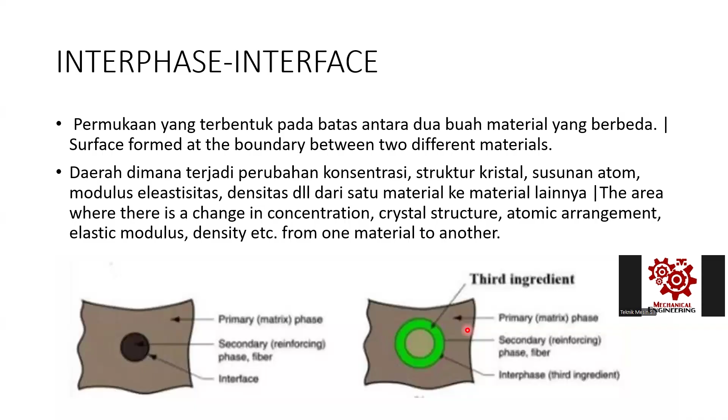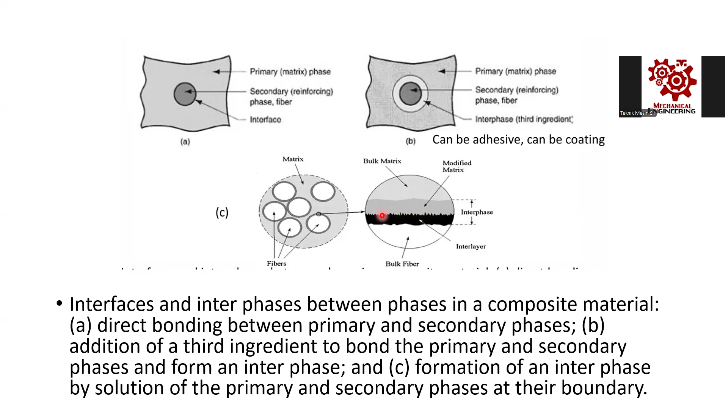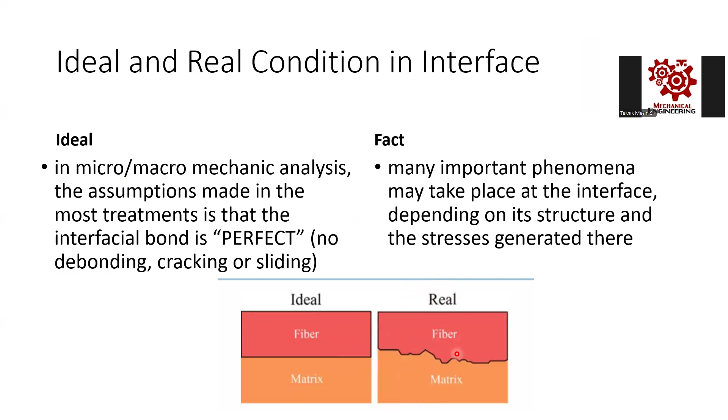Condition on the interface: the ideal in micro and macro mechanic analysis, the assumption made in the most treatment is that the interfacial bond is perfect. So the ideal between fiber and matrix is menempel - rata, menempel, sangat erat. But in reality, because there are many phenomena, depend on the structure, depend on stresses generated, the reality between fiber and matrix is like this - jadi dia nggak rata, more rough, lebih kasar antara hubungan serat dan matriks di kenyataannya.

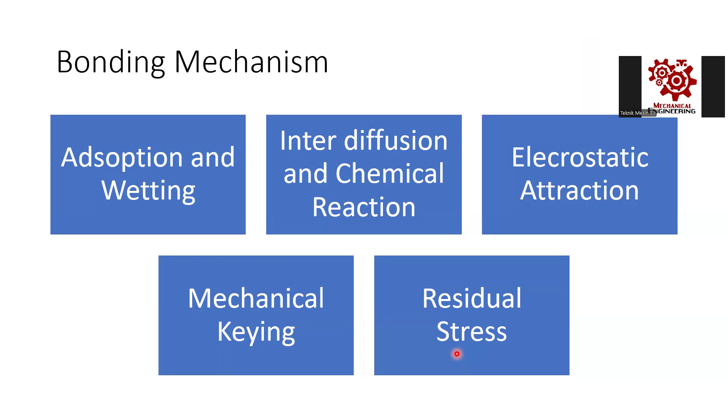Oke, so the bonding mechanism has five types: interdiffusion, chemical reaction, electrostatic attraction, mechanical keying or mechanical interlocking, and residual stress. Actually this is what happens on the interface - ini apa yang terjadi pada interface itu.

Oke, pertama kita mulai dari wetting and adhesion. Jadi ini salah satu parameter untuk kita mengetahui, oh ternyata interface dan interphase ini terhubung dengan baik - hubungan antara serat dan matriks ini terhubung dengan baik. So this is the parameter to determine whether the bonding strength is good or not.

The first we start from wetting - atau kalau dibahasakan, pembasahan. Wetting terjadi ketika dua permukaan benda bersentuhan secara spontan, bahkan sampai skala atom, saat keduanya didekatkan satu sama lain. So wetting is when two bodies spontaneously come to intimate, until atomic scale contact, when they are brought close to each other.

So when there are two materials close to each other, the two materials become one body - join, mix. Dia akan menyatu ketika digabungkan.

For example, if you have two water droplets - kalau misalnya kita ada dua butiran air di sini, ada di sini. For example, when you see water, and then when you try to move this water into this, so the water becomes one. So this is an example of wetting. And the second, adhesion.

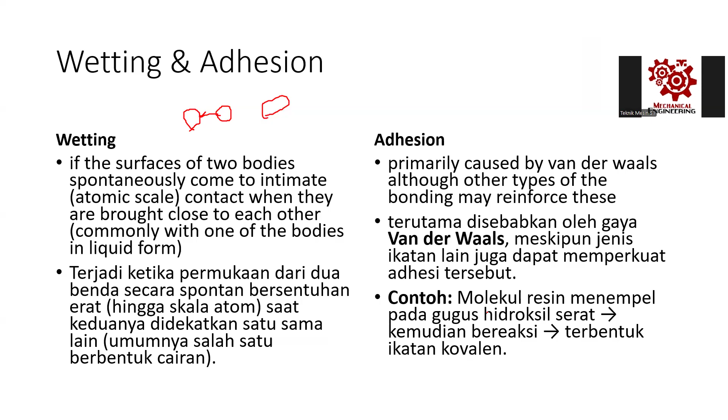For example adhesion: when resin molecules attach to the fiber groups, they will react and form a covalent bond. So for reaction when you use resin for fiber, the resin will bond with the fiber.

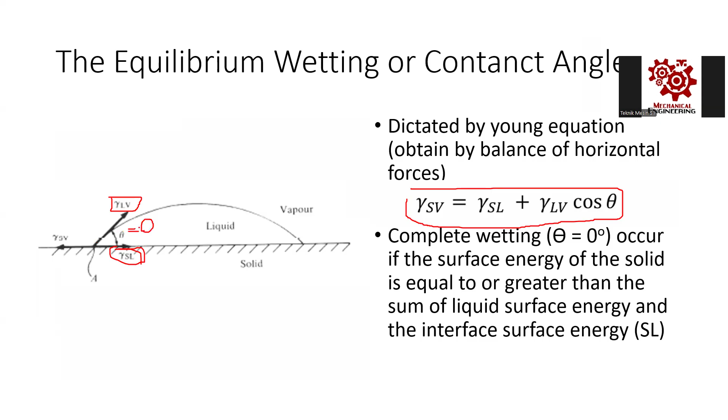So complete wetting happens when the angle is zero, when the angle here equals zero. This is called complete wetting. Here is an example of complete wetting, and at 180 degrees there is no wetting.

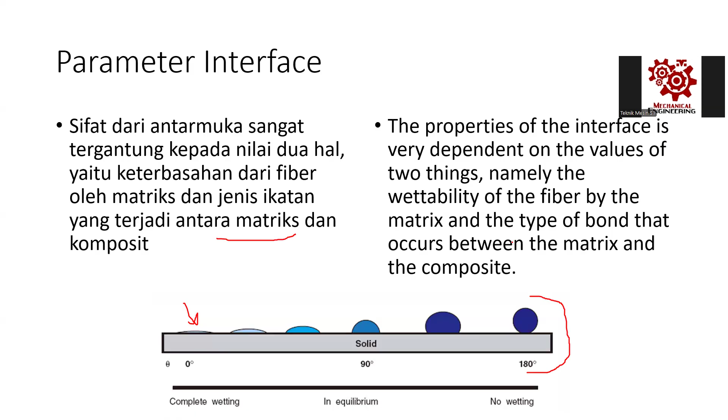So the interface properties depend on the wettability, and second, on the type of bond between matrix and fiber in the composite. On wettability, we must also know the terms hydrophobic and hydrophilic.

We know phobic means scary, like afraid. So hydrophobic means it is like afraid of water - hydro is water, so hydrophobic means afraid of water. That means if the surface has a hydrophobic surface, it will not mix, will not make good bonding with water.

Meanwhile, hydrophilic is the opposite of hydrophobic. That means hydrophilic is very fond of water, so hydrophilic likes water, which is why it can bond with water.

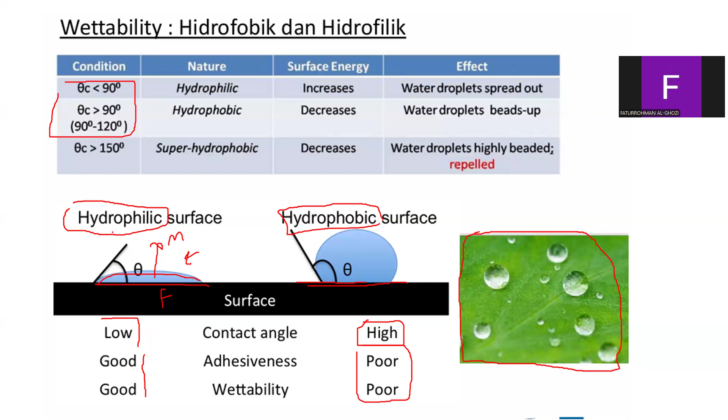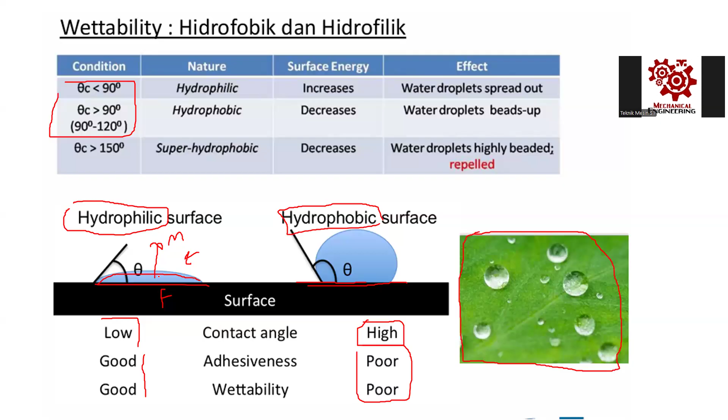So, for water this is only for simple illustration. But wettability means, what is it, most of the joining between matrix and fiber. The simple one is like that. This is the example, I take it from a paper. So the effect of alkali treatment on wettability of the coconut fiber.

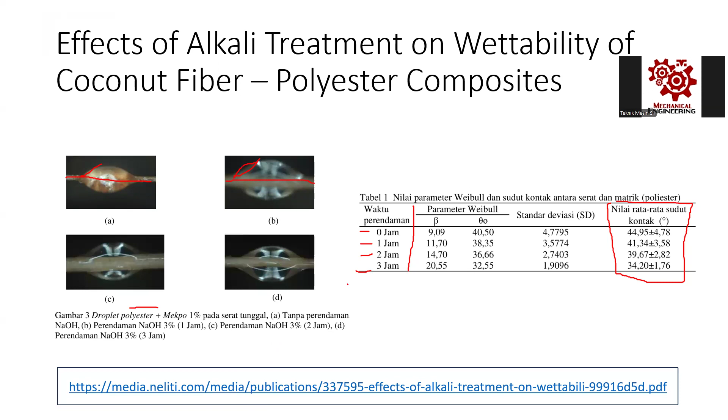If you want to see details about the paper, you can click this link. Okay, and then the first is about the electrostatic attraction. Elektro means electric, static means still. So electrostatic attraction occurs if two surfaces carry net electric charge of opposite signs.

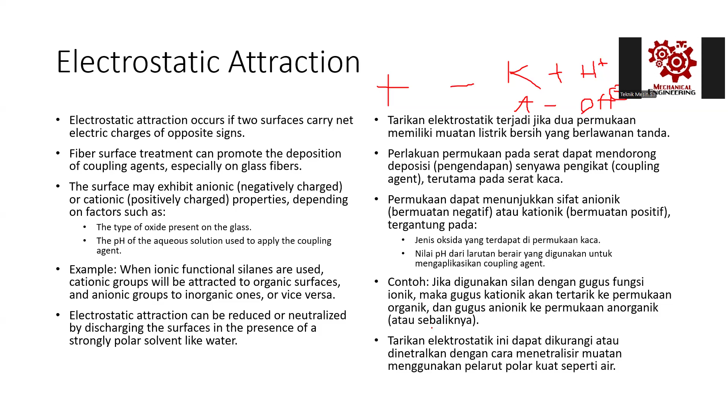Nah, this is the example. So they use the polymer PES. And then this is the simulation. So they change the function group. This is no treatment. And this is they change the fiber with the hydroxide, with the COOH function group, and this is only O, oxygen ion.

So stabilitas antar muka tertinggi terjadi pada saat grafen dimodifikasi dengan gugus COOH. So the interfacial stability is obtained when the graphene is modified with the COOH groups. Kita ubah gugus fungsinya menjadi COOH. Because there are attractive forces between the positively charged S and H atoms of PES and the negatively charged oxygen atoms of COOH. Jadi PES ini sebagai matriks.

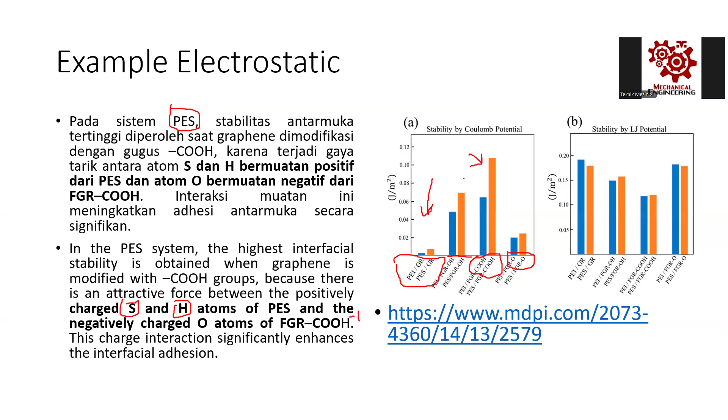Okay, the second bonding mechanism is mechanical keying. This effect originates from surface roughness provided that proper wetting has taken place. Jadi ini berasal dari permukaan yang kasar dengan catatan wettingnya sudah terjadi baik. So we make the surface of the fiber rough, but you must take note that the wettability is good for this surface. And their influence is significantly more pronounced under shear loading compared to decohesion caused by tensile stress.

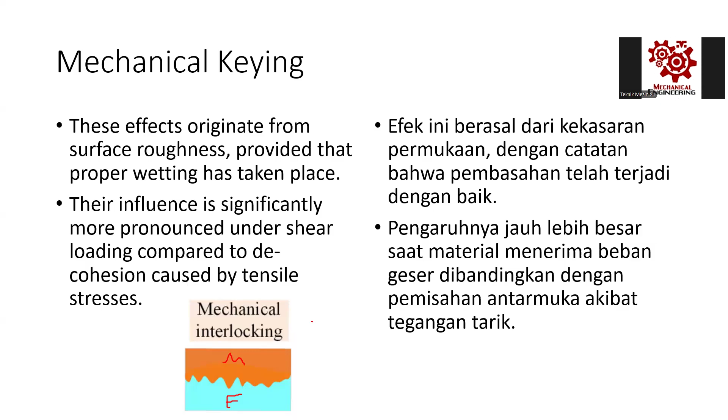Okay, any questions on mechanical keying and electrostatic attraction? Sometimes we call mechanical keying interlocking. Mechanical interlocking because it's like a key, saling mengunci. Can we go to the next slide? Saya lanjut atau ada pertanyaan dulu? Ya Pak, aman Pak. Aman. Oke.

Okay, residual stress. The nature of the interfacial contact is strong because of the presence of residual stress. Jadi kadang ikatan kekuatan itu meningkat karena adanya residual stress. Kenapa bisa terjadi residual stress pada komposit? Because of plastic deformation of the matrix and phase transformation, especially thermal contraction during fabrication. Jadi komposit memiliki thermal expansion coefficient yang berbeda. For example, resin and karbon pasti memiliki koefisien ekspansi thermal yang berbeda.

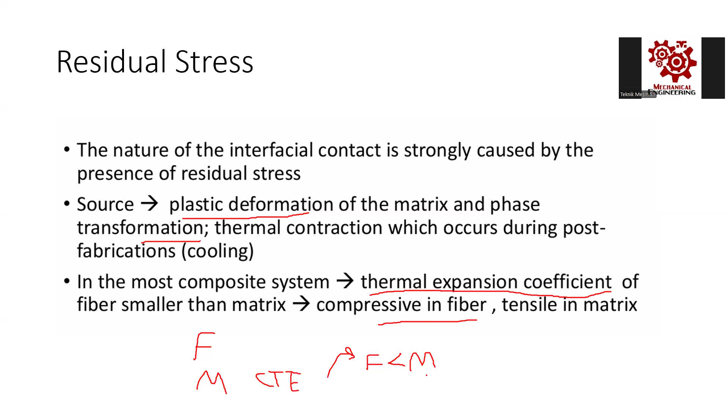So different. Dari ngomongin gue. Gimana Paulus? Mau nanya? Udah. Setelah dipakai Zoom. Ini kenapa kalau ngobrol sendiri nih? Ada pertanyaan? Mau nanya Paulus? Oh enggak, kirain saya mau nanya. Lanjut.